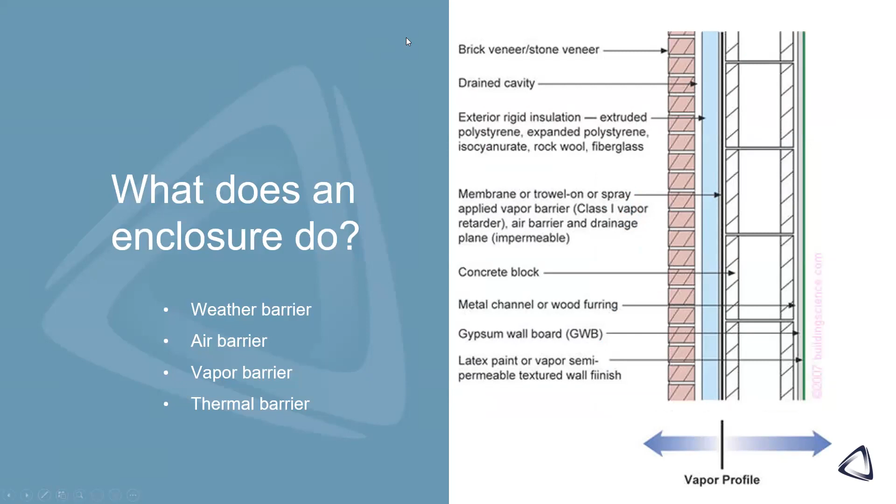Are you able to see the next slide here with the weather barriers? So there are different types of weather barriers, and their primary function is to resist any kind of weather elements affecting the building, and to get them out and away from the building so they don't have an opportunity to intrude inside.

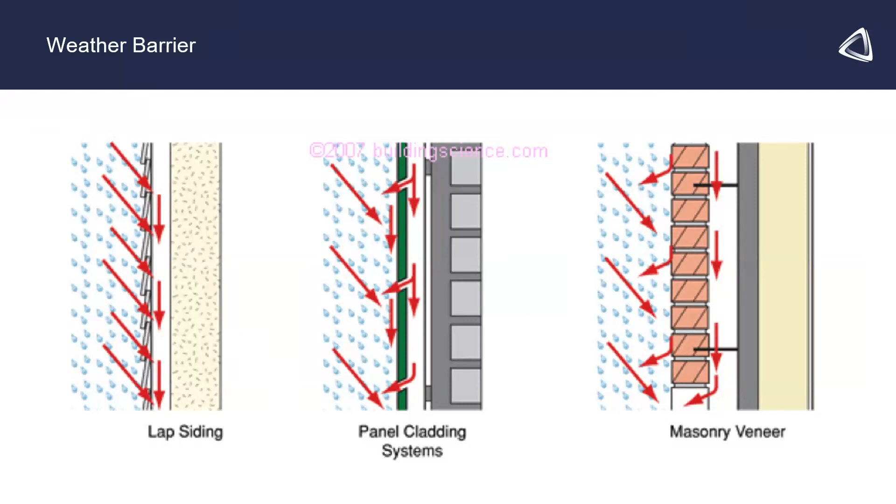You may have siding that has drainage on the inside, metal panels or cladding, or a brick system. All of those are meant to resist a majority of moisture or snow, and then also have some sort of drainage system. With a brick wall, there are weeps, or usually netting, to capture any materials that get back there and direct everything out and away.

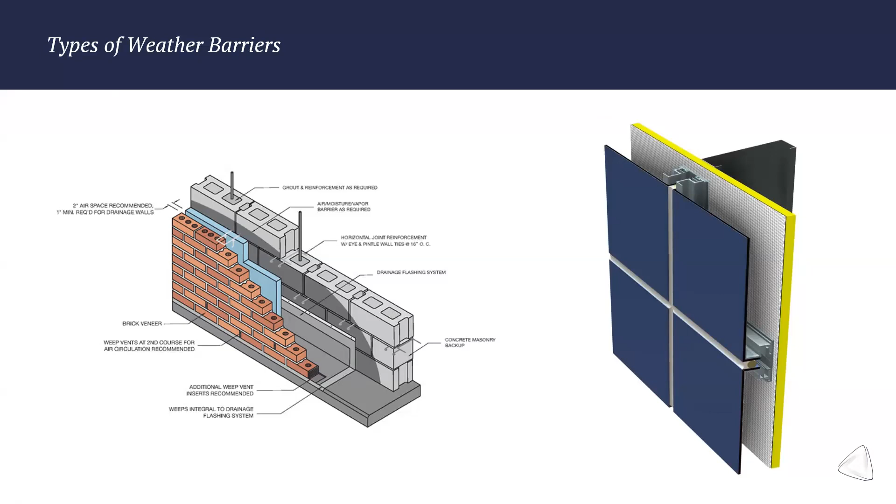Metal panel systems likewise have their rain screen, and a gap behind them intended to direct water out and away from the building. That's its primary function—to make sure the rest of your wall system can manage the other components and not have to deal with the intrusion of water or the effects of driving winds.

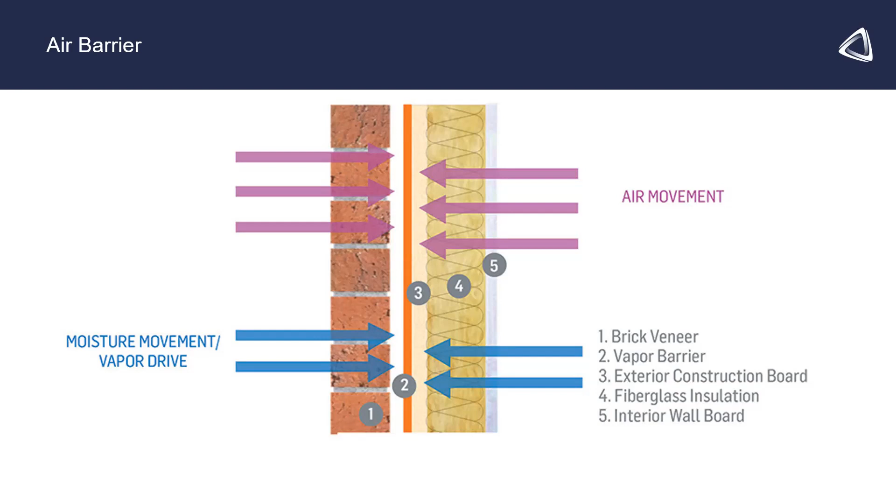The next layer would be your air barrier. An air barrier is exactly what it sounds like: it prevents air from moving from inside the building out in an uncontrolled way, or from the outside in. You may notice this as drafts or an inability to control the temperature in a space. Those are all signs that you aren't able to prevent air movement within your building.

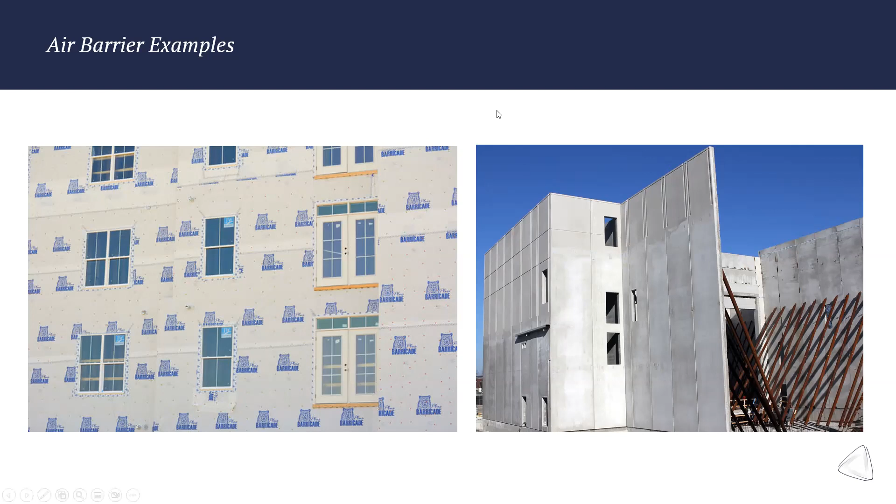The whole point is to prevent infiltration and exfiltration—you just want to be in control of when air is entering or exiting the building. Anything uncontrolled is going to directly impact comfort and your occupants.

There are a couple of different things: there's driving wind that can drive air into or out of your building, and there's a stack effect, which is essentially warm air rising. When you have a lot of warm air rising with a pathway out, that draws air in at the lower levels—again, uncontrolled air that can cause discomfort. And then there's also combustion and ventilation.

Your HVAC systems typically are controlling the ventilation, but you may have combustion, especially if you have older boilers or water heaters that might draw air from the building for combustion. You want to make sure there's a free-flowing path to make up that air, so you're in control of it and not just dealing with air coming in any opening or crack it can find.

So if you find yourself with drafts, air intrusion, or issues controlling temperature or humidity, you may want to look at your air barrier.

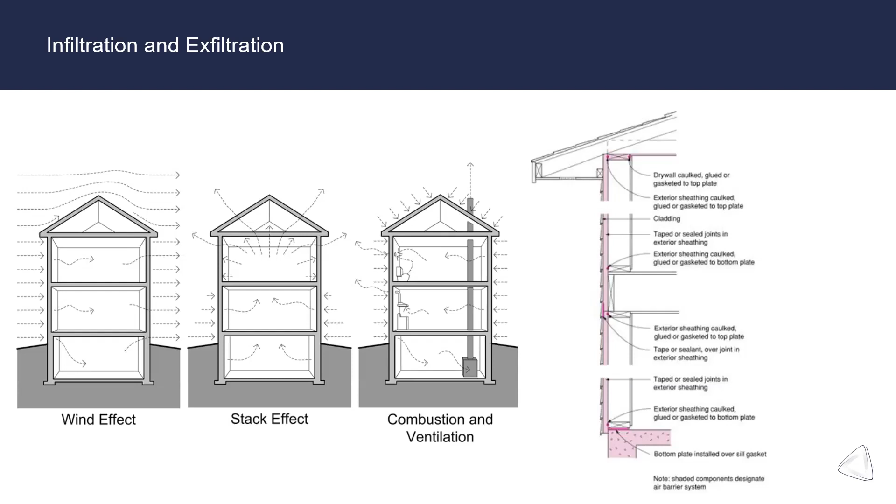And then at the top of your wall, into the attic space, you don't want your air moving up into the attic, because that would encourage the stack effect. So anything at the top of the wall, make sure it's sealed up—those are all things you could look at if you suspect you might be facing some of these issues.

So there's going to be a desire for air and moisture to migrate inwards towards your interior space. There are different ways to combat this. You can positively pressurize your building, which is always a good thing to do, just to have it slightly positive, so that if a door is opened, or if there are imperfections in your envelope—which there always are—the air wants to move outwards, giving you more control over comfort.

In cold climates, or winter conditions, when it's cold outside and you have your heat on and it's warmer inside, you have the opposite, where temperature, air, and moisture want to migrate out of your building to the exterior. There are different scenarios where you may want to look at different building pressure settings, whether positive, negative, or neutral. That would depend on where your vapor barriers are and how your assemblies are put together.

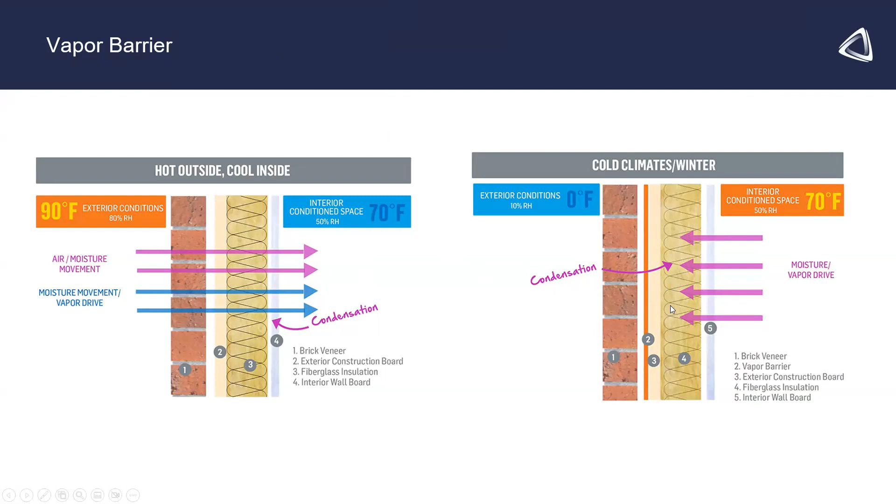If you have newer construction, a lot of the newer materials can't withstand that vapor movement as much, or aren't designed to, so we see vapor barriers more commonly today. The big takeaway is that if you have a wall system without a vapor barrier that's intended to have vapor move through it, you're probably best sticking with that method rather than trying to redesign or re-engineer it, but more so try to get it back to its intended function if there are any deficiencies. This is just a general overview of a vapor barrier.

You want to have a continuous barrier throughout the building, meaning a barrier under your concrete slab, a barrier within your wall system, and your roofing system, and they all need to tie together. If you find humidity issues in your building, or issues with moisture or freezing within the walls at some point, these connection points between different barriers are culprits where failures can happen more easily. But in general, your vapor barrier is where you'd want to investigate that.

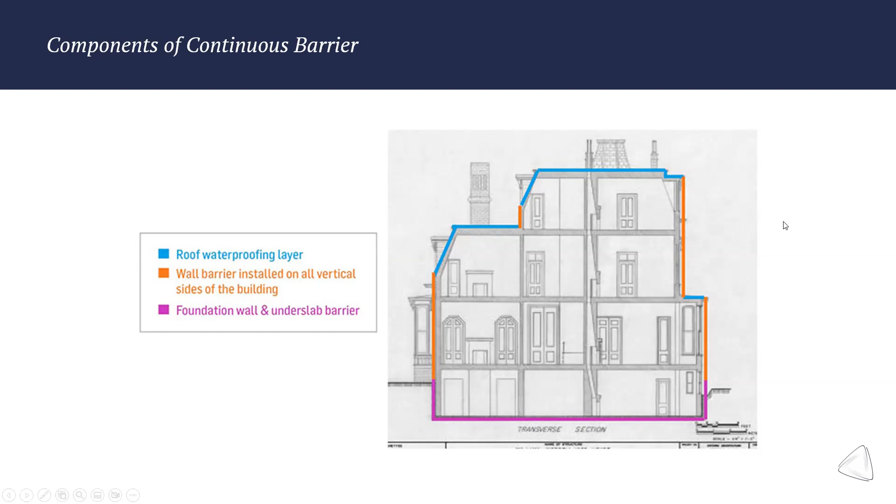Continuous barriers, so the foundation, you have a sheeting that goes under the foundation. Obviously not much you can do about that after construction. If you have it, great. If your building was built before that was common, then you may not have it, in which case you most likely have a building that's designed to allow vapor movement.

Wall systems, it could be a sheet or spray applied. And then on roofing, there's a lot of different roofing types, but like a TPO is a common one we see today.

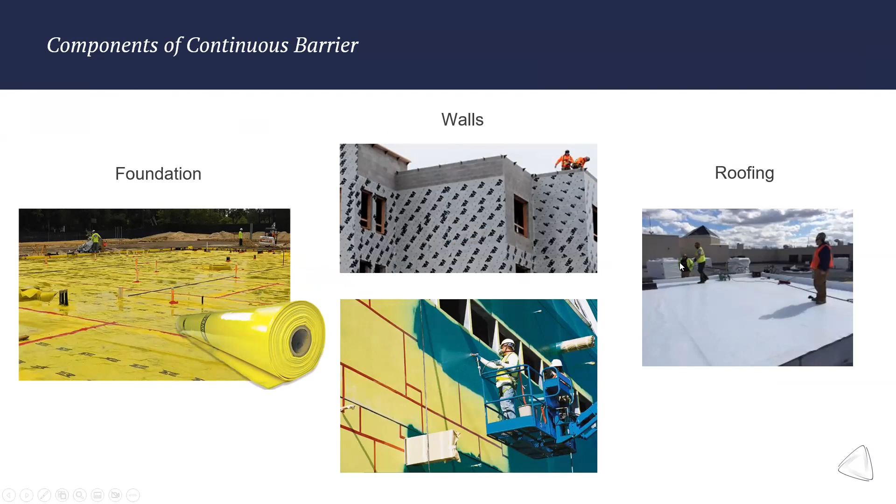For vapor leakage, just to get it into perspective, if you had a 4x8 sheet of gypsum that had vapor differential from one side to the other, so it wanted to travel through your gypsum board, that board itself may allow 1/3 of a quart of water through over an hour under this fixed condition. But if you had a hole in the wall, just a 1-square-inch hole, maybe like a poorly sealed electrical outlet or something in a drywall opening, that could allow up to 30 quarts of water in just by allowing the migration of air and moisture.

And so in the summer, if you're seeing anything where you have high humidity in the spaces, it's muggy, it feels sticky, and you can't figure out what's going on, your HVAC seems to be working properly, this would be a good place to look. See if you can feel any air movement where you have any penetrations or openings in your walls, and look inside, interior and exterior, to see if you can find any potential leakages.

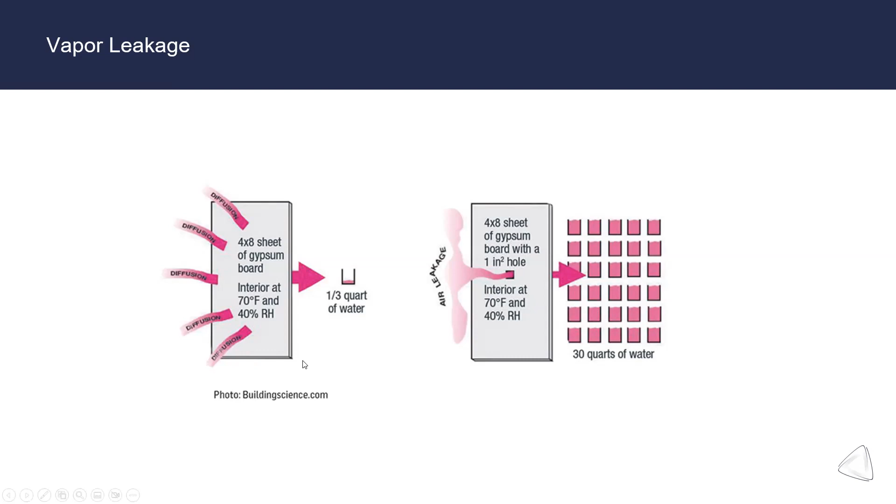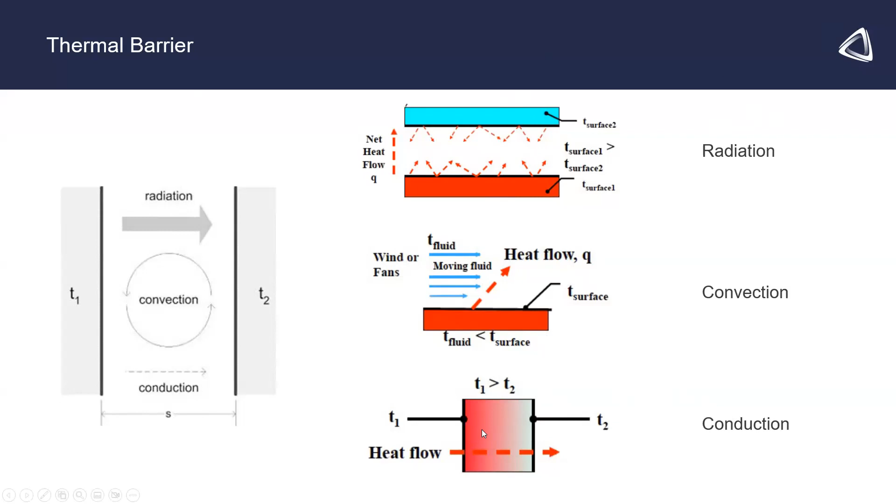The next is the thermal barrier. Thermal energy can transfer through radiation, convection, and conduction, and these highlight those 3 different methods. Radiation would be between surfaces that aren't touching. Convection would be through the movement of some medium like air. And then conduction would be through materials that are touching or just have a temperature gradient across them.

To combat that, you can use insulation, and there's a lot of different types of insulation. There are applications where some types are more important or more applicable than others. So there's batt insulation and blow-in insulation that you can commonly see in walls and in roofs. And blow-in insulation may be a good option if you're looking to ever retrofit or add insulation. That's usually one that's easier to get into an existing structure.

And then there's rigid insulation, mineral wool. You have 2 different types of polyiso, with and without the foil face on it, which would basically say if it does or does not allow vapor to travel through it. And then just like your typical styrofoam. And then there's also spray foam, which comes in open cell and closed cell styles. Really, if you want to add insulation, these are kind of the options that are out there, but it's definitely worth having someone look at your construction type and recommend an appropriate insulation type for you.

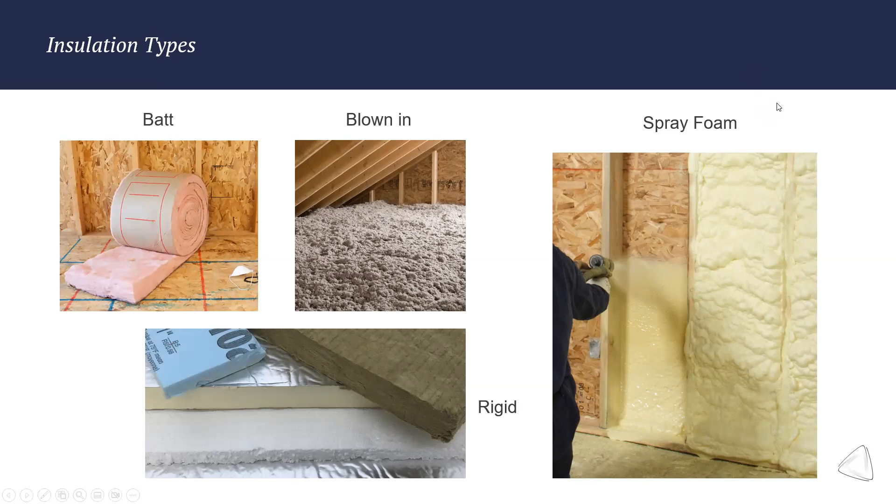And then thermal leakage is kind of the result of poor insulation. There's a lot of different areas where it can happen. Windows and doors and any kind of openings or penetrations are a great place to start looking.

On windows, you can look at sash leaks. You see little streamers like this. Streamers indicate air movement. So if you have air leaking in, something like that, it would show up in that way. And so you might want to look for seals or something like that.

The frame here is very dark, so that would indicate it may not have a thermal break, maybe it's conducting, or maybe there's a failure of a seal. This outlet appears to be leaking, so that would maybe be air moving through the wall system there. And at the floor plate here, you can see the cold gradient. Potentially there's not a good seal at the floor plate or something there that needs to be looked at.

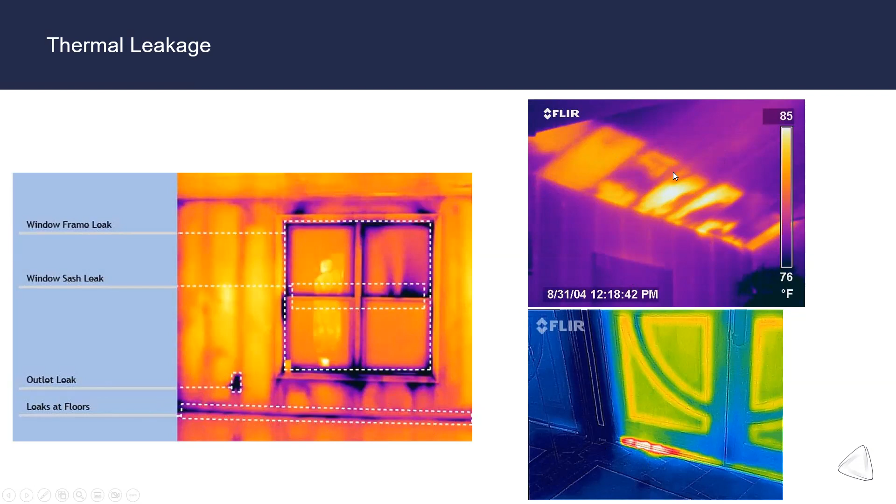Door seals as well are a common culprit. Just making sure that they seal properly can make a big difference, especially in the hot summers and cold winters. And this is an image, top right, of a ceiling that has poor insulation at the edges of the roof. Things like that where you might want to consider additional blow-in insulation or batt insulation.

Next I want to go through some signs of compromised building envelopes, things that if you're walking through your building and you see, you may want to take note of and consider taking action on.

Any peeling or flaking paint can be a sign of swelling due to moisture, which in this top right picture is hopefully obvious to you. If you have water just dripping out, that's a problem, but a lot of times it's not that obvious. It's just moisture or condensation that continuously shows up in one area and can lead to mold or swelling of drywall or plaster.

Likewise, you can see this black in the windowsill, and you can see the paint degrading. Those are all signs of moisture, things you could look at that could cue you in that maybe something there could be improved or something is broken down.

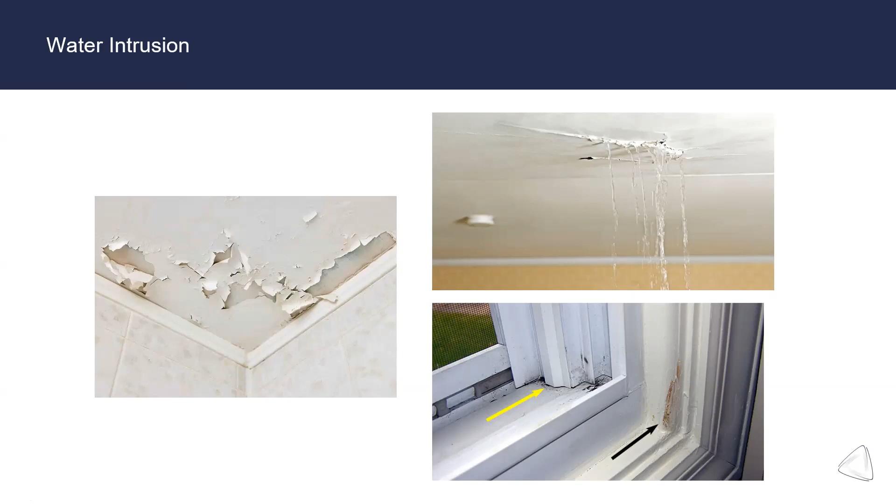Mold is an obvious one that everyone is kind of keen on. Anywhere you see mold, that means there's moisture, and your building's not intended to have moisture sitting in any of your interior or wall spaces. So anytime you see mold, know that there's most likely a cause that needs to be addressed, and also the repair of the damage.

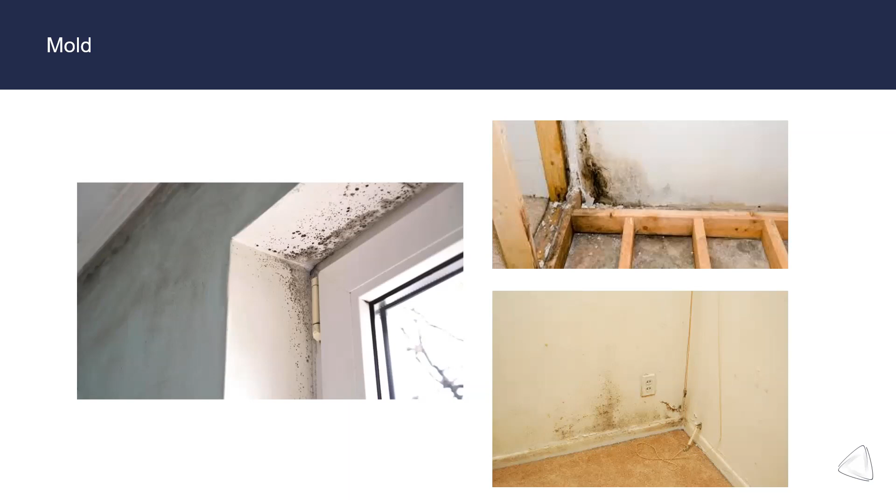There's penetrations from air conditioners that would be good places to check for leakage. Where your floor to floor connections are, there could potentially be leakage if there's not a good seal at the floor plate or at the ceiling level. Where your wall cavities meet your attic, you want to have airflow in your attic, but you want it to go from your eave up into the attic space and be neutral temperature to the outside. You really don't want air from the interior of the building going up into your attic space. That can cause melting of snow and icicles and things like that, which can cause damage or just be dangerous.

Any penetrations to the attic space are good to look at: exhaust fan openings, duct connections, lights, whatever there may be. If you have a lot of infiltration, all of those things could be adding up to what is equivalent to a large opening, but not apparent as a very large opening. And then there's window seals, door seals, and those types of things that are all great to look at.

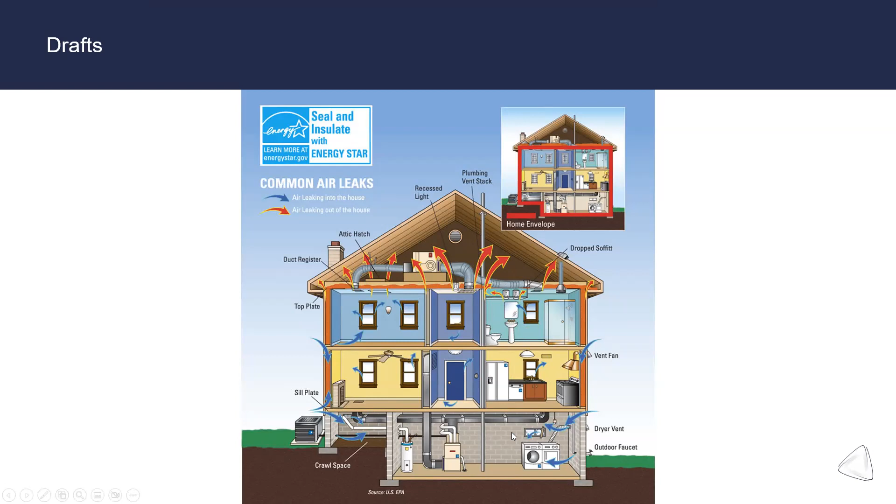Condensation is another one to look for. If you have single pane windows, you may see condensation, and that's more a result of older window technology that really doesn't have the ability to prevent it. But if you have double pane windows or windows that are thermally broken, you wouldn't typically see that with common interior conditions.

Now, if you do have single pane windows or non-thermally broken frames, meaning if you touch the frame it would be conducting from the outside, so it'd be very cold, you can prevent condensation by maintaining a lower indoor humidity. That's a good way to address the issue related to the construction of the building, but it may have a negative impact on comfort. But if you do have more modern windows or thermally broken frames and you're seeing condensation, that could be a sign of a break in the seal for the gas between the glass, a break in the seal for the window frame, or a construction error causing a thermal break of some sort.

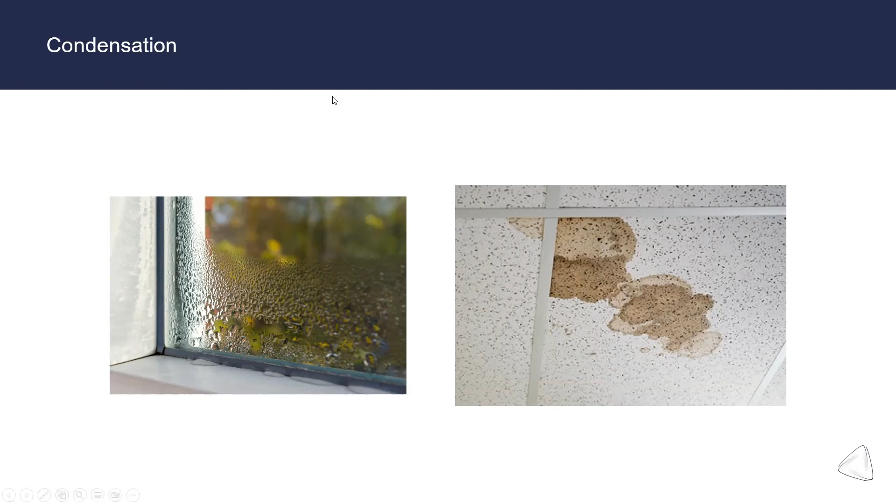And those are potential areas for mold to form or for damage to happen due to the moisture. Also ceiling tiles, if you see them discolored, that's due to moisture. And just know that replacing the ceiling tile isn't the fix. There's usually some cause, and it's definitely worth looking into what that cause is for the moisture, and of course then replacing the ceiling tiles once it's taken care of.

So that was really quick, just trying to give a high level overview. I'm definitely happy to answer any questions, and a lot of what you come across is going to be specific to your building. So Catalyst Partners is a resource for you to utilize throughout your treasure hunt.

Please feel free to reach out if you have questions. We do have a thermal camera, and when we do our visit to the sites that we are sponsoring, we intend to bring it with just because it's a great tool. But if anybody else wants to try to track one down, just know we have one, and we'd be happy to try to share it if there's any benefit to you.

All right, great. Well, I wasn't keeping track of time, so I hope it was good. That's okay. Does anybody have any questions at this time?

Just want to thank you, Mr. Warren Tursky. It's an excellent presentation, very comprehensive overview, and really stimulates our thinking, gives us this whole other organized way of thinking about our building. Appreciate it very much. My pleasure.

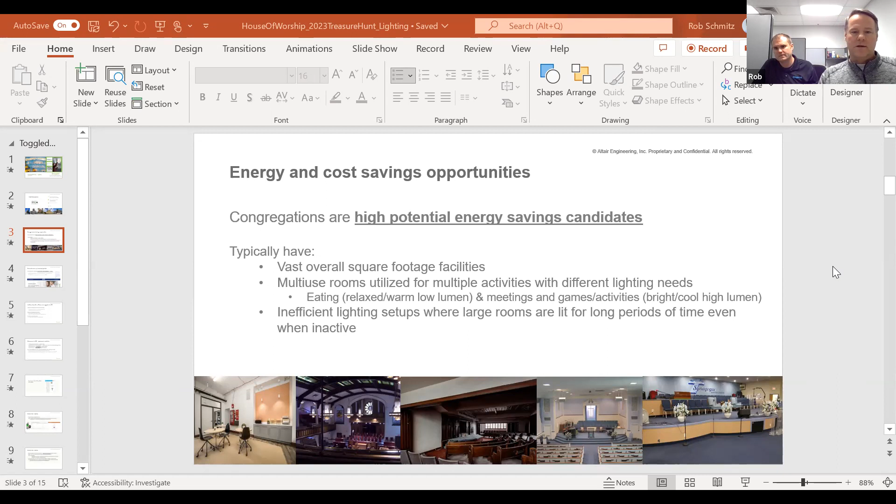A lot of people in my experience, when you start to go down lumens and kelvins and color temps, it gets a little confusing. So a lot of people will think of LED as being very cold and uninviting, and I think that's just very inaccurate, to be honest with you. They've come a long way with LED, with efficiency, and it's just a nice way to complement your lighting and save a lot of good money. So definitely consider LED moving forward.

Investment periods, I just want to touch really quick on this. We've seen more recently even better than 1 to 2 years from your initial investment for your return, obviously with the reduced energy bills. So some of the smaller projects we've seen, and Ryan's much more versed on this than myself, 6 to 8 months and you're good to go. You've got that future of decades of lighting. So definitely a good decision if you haven't already looked at upgrading fluorescent to consider it.

And I kind of touched on some of this, but your aesthetics greatly improved with LEDs, security because of the better quality light. As a visitor, I'm in lighting, so I'm always looking at buildings when I walk in. I'm looking at the lighting, but I quickly notice when lights are out and whatnot, it just gives a bad appearance for the building. So it is important to make sure all your lights are on and working efficiently.

Extending maintenance periods is another big feature for LED. A lot of buildings, maybe you need a lift to get up to high ceilings. Fluorescent lights tend to go out yearly, to be honest with you. You've probably experienced that if you have fluorescents. With LED, again, you get decades. So definitely worth that investment.

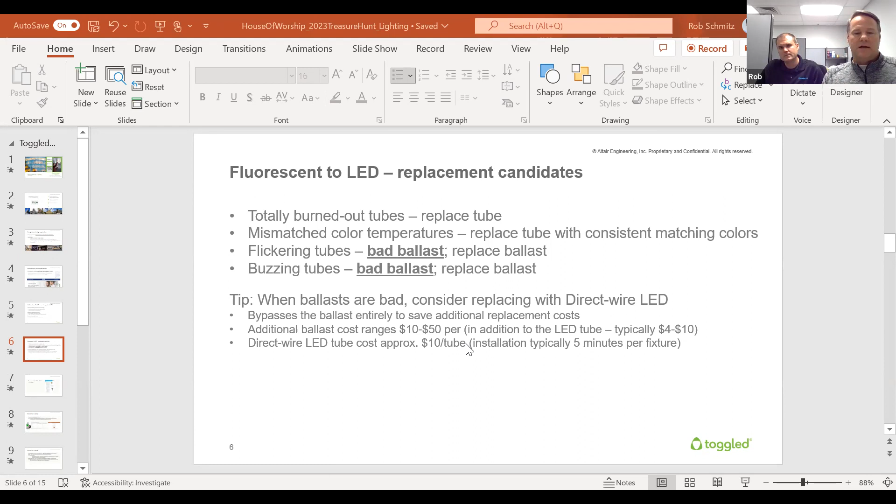Not to mention, you have to get the correct ballast replacement, and Ryan's done numerous jobs like this - sometimes it ends up being an issue. So getting rid of that is a definite if you've got buzzing or flickering.

I want to spend a couple minutes on this checklist from last year for lighting specifically - hopefully this is still accurate. We're happy to walk through buildings with anybody of interest. The first step is ensuring proper lighting levels. There's a light meter out there - we have one, but you don't need to buy this by any means. If you do want to do it on your own, we've seen them on Amazon for 30 to 50 bucks, but it's not necessary. It's something we can come do - we'll make sure the lighting levels are accurate for you.

You don't always want to replace specific lights with the same lighting lumen levels. We're always looking to improve with these upgrades, and this is a tool that helps us do that.

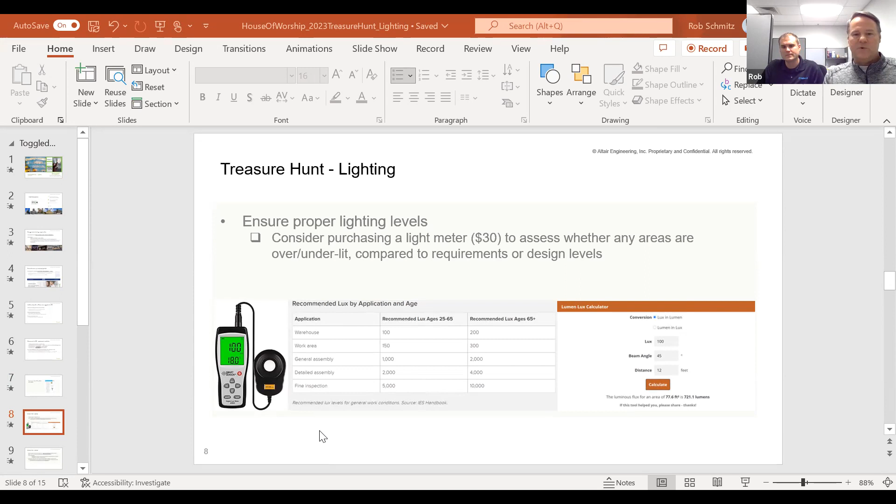Typically what we'll do, if we do come along or you do this on your own, is walk the grounds and do everything we just talked about - look for the lights, see where you're missing lights, etc. We're pointing out worship areas, offices, restrooms - there's a lot of rooms typically within your facilities to look for. Usually back rooms are culprits - a lot of people aren't looking at back rooms, so we see a lot of light outages and issues there. Keep those in mind.

There's a point here about checking the parking lot outside for day burners. This really applies more when you have lighting controls or sensors - a lot of times those sensors get covered with dirt and blocked, and they end up on all day long. So if you have an issue with lights being on and you've got controls, make sure those sensors are clean. If you don't have sensors and you're seeing lights on, that's probably just people leaving the switch on, which is unnecessary energy loss. We'd encourage considering sensors in that situation - they're really not that expensive and could save you considerable amounts of money.

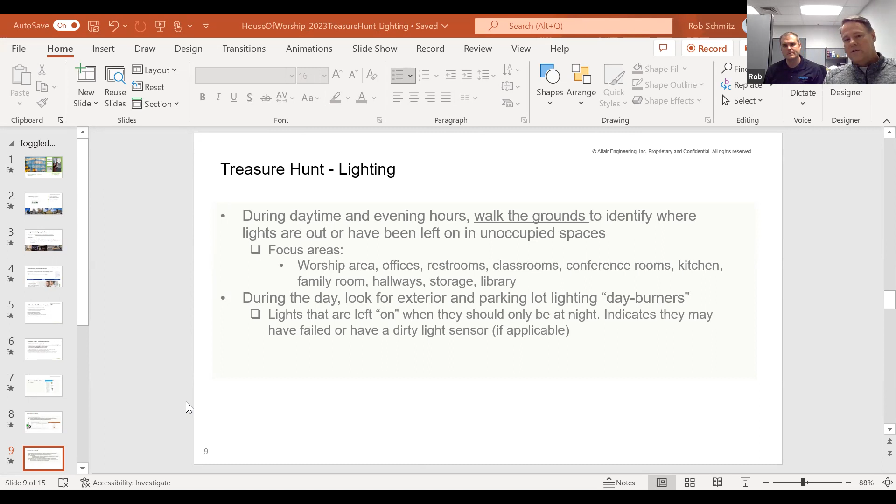And not a lot of headaches. I think these sensors have come a long way over the years. So, moving on.

Upgrading your exterior lighting is more for your neighbors, if you will. Consider shielded fixtures that direct light where you need it. We've seen this being a big issue in the Metro Detroit area, lights going every which way. It's a nuisance to your neighbor and it's not giving you what you need, so getting a shield for that is a good way to correct it.

I mentioned checking for cleanliness. Again, it's shocking how quickly things get dirty - dust, bugs, debris. We recommend setting some sort of schedule for cleaning to make sure that's not forgotten, to improve your quality of light.

There's a point here about considering delamping. This is something that would be paired with the light meter. A lot of rooms, believe it or not, are lit too much. The people that set the rooms up may not have really been looking at those levels, just throwing lights up haphazardly. So there's a chance to take some lights out and still get levels that are good with less energy usage.

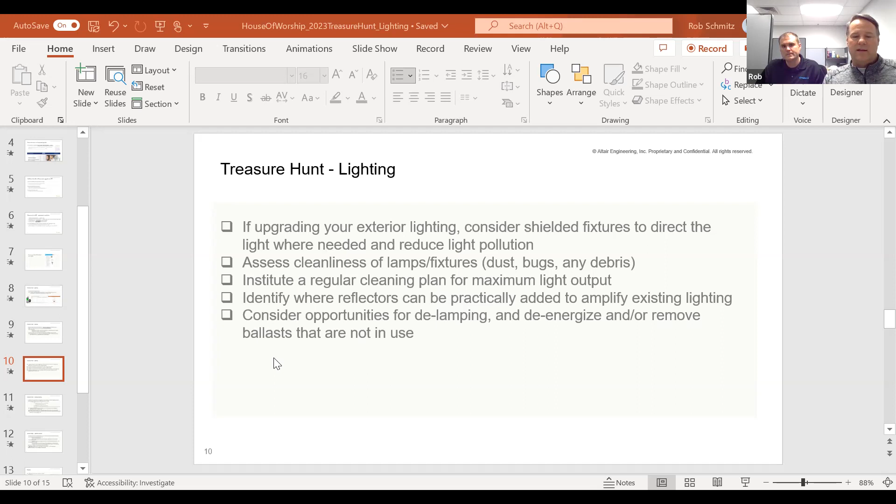T12 fluorescents, if you're not familiar, are like 1.5 inches - the big tubes. I know sometimes we take for granted what you're looking for, but if you see a large glass tube, more than likely that's a fluorescent. We'd definitely move to LEDs, which are T5s and T8s, to get that savings.

We've seen anywhere up to 70% savings. Some of the older fluorescents are really inefficient. Even the newer fluorescents, your lumens - light output per watt - is roughly 50, and that's on a good day. With your LEDs, you're looking at 131. That's showing you where the energy savings is, and that's a low number I'm using for the LED example too. So definitely something to consider if you're looking for energy savings.

Longer life too - there's a ton of ranges for fluorescents. Honestly, I've seen things blow out in 6 months, but with LED typically you'll get guarantees of 50,000 hours, which if you do the math is decades of usage. With us and a lot of other companies in the LED market, it's pretty easy to get a warranty replacement should there ever be a failure, because they're so rare.

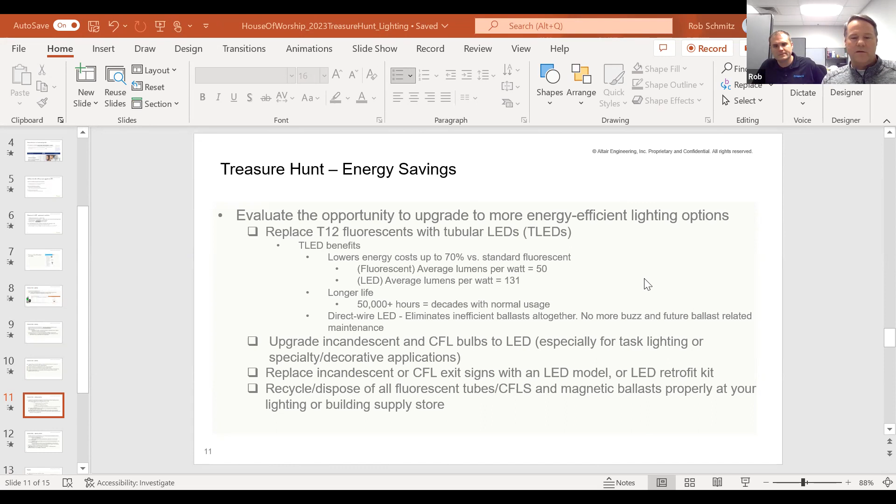Lighting controls, I touched on earlier - we do offer lighting controls, we don't manufacture lighting controls and building controls. It's something we can help you guys with. If there's interest, we can direct you to whatever you might need, any kind of third party out there. So if there are questions on lighting controls, let us know.

We do see this with motion sensing - a lot of rooms aren't in use despite congregations. You've got one switch lighting 50 fixtures, and it may be on all day. I'd say it's worth putting a sensor in so that when there's no activity it'll turn off. Some hesitancy we've seen with customers is they don't want the lights going off after 3 or 5 minutes. But you can set the systems to turn off at whatever duration you want - if you're not comfortable with an immediate turn off, you can program it for hours. 30 minutes would be realistic, especially when people go home at night and often forget things on.

I definitely recommend the sensors there. Schedule timers - this is a nice feature too with lighting controls, because obviously you can set things up. You can probably do 10 different schedules for a day if you really wanted to. The cleaning crew comes in at 6 o'clock and they're there till 8, so when the light's on, you can program it however you see fit, when you start the day, etc.

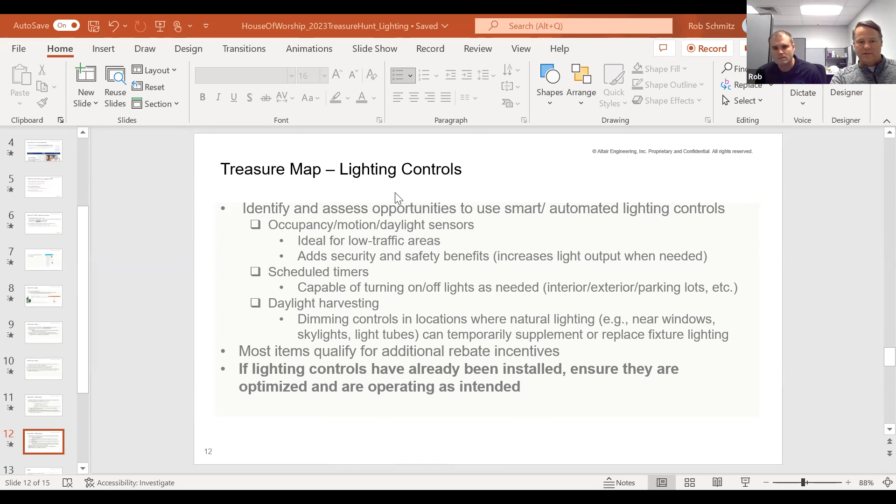Mentioned that already, the rebates. I did list a couple resources out there if you want to do some research on your own, but Energy Star is a good one. I've put in there energystar.gov. There are additional sites - again, this is more Ryan's area.

Are there any other sites that you'd recommend? DTE is a nice one to check out, and they'll offer more detailed information than I'm relaying here. Yeah, DTE is a good one - if it's on the DTE site, there's a good chance they're a reputable company.

That was one of my big points from a few slides ago - LEDs aren't created equal. There's a wide variety of very high quality product all the way down to the cheapest of cheap, and sometimes it ends up catching you quicker than you think. If you go through all this work to replace and upgrade to LED, you don't want to be back to replacing your lights 6 months from now. So there's cheaper options and the highest quality out there, but they'll be reputable if they're on that DTE site.

I'll piggyback off Rob here - a lot of places of worship in the last 6 months have had LEDs in their buildings for say 2-3 years now, and they're like, all right Ryan, what's the next thing? That's where lighting controls are becoming that next 30%, 20%, 40% in some cases. Places of worship have little spurts of population - Sunday service they might have a full house wall to wall, an hour after service they might only have one room occupied, but yet the lights are on all day. So that's been their next 30-40% - we all got LEDs, we did all these upgrades, now what's next? And the lighting controls is where the next step seems to be headed.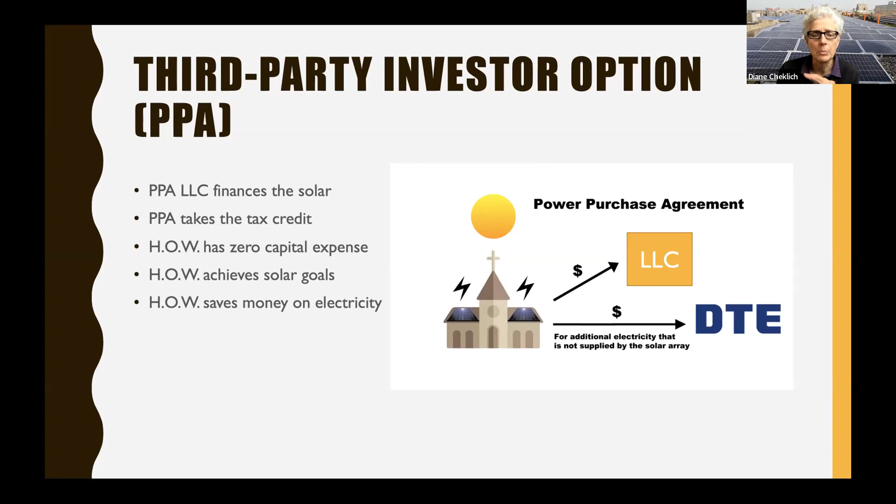This little graphic shows that for the energy generated by the solar, it's like you're getting two electric bills now that together add up to less than what you were paying before. You'd pay one to this LLC for the energy generated by the solar, and for any electricity still necessary after that, which the solar probably won't cover entirely, the rest would be supplied by DTE. That's typically how that arrangement works.

Now, there's also kind of a before and after option here as well. If you're interested in using this third-party option, where do those investors come from? Well, a lot of times it's, who do I know, or is there someone within the congregation? Like Bob Chapman, like me, has done a third-party investor approach to get the solar on St. Peter's. But those people need to be recruited.

They need to be identified, who are they? They need to form an LLC. You need to select an installer, keep an eye on the system, make sure it's up and working, and also create invoices every month for that energy.

So there's a bit of a lift there, and I speak from my experience as well. It definitely can be done, and there's sort of a cookbook formula you can follow, but it's a lift, and it's sometimes hard to find those investors on a case-by-case basis.

There is a new option being formed as we speak, a turnkey PPA that could be available, where the investor is already in place, the LLC is already in place, the installer is in place, although there could be other installers. You would sign up and get all the advantages of participating in a PPA, but you don't have to create it from scratch and go out and recruit people.

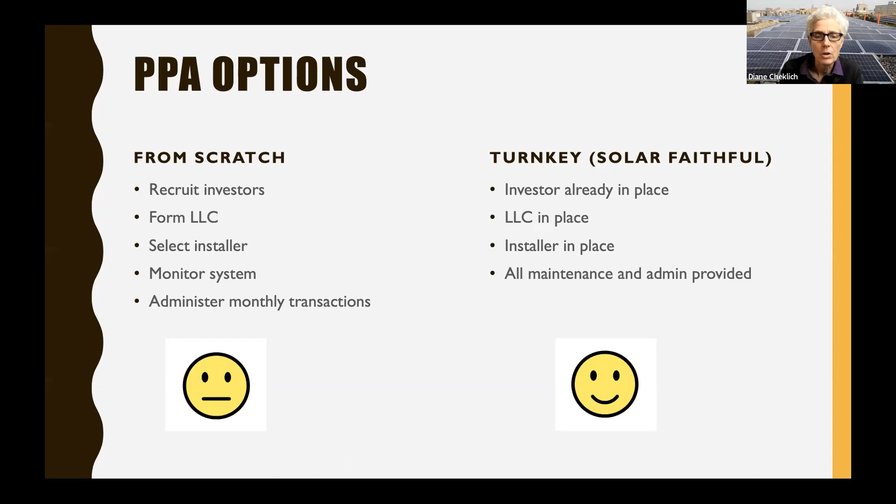That group is called Solar Faithful, and it is a PPA service focused on houses of worship. It's a nonprofit organization itself, designed to make this PPA model more accessible, to lower the barriers of participating in this type of model without having to reinvent the wheel and create it yourself every single time. So there is a single financing partner who's already there and has agreed to finance multiple projects.

The participants are still guaranteed a lower energy rate than through the utility, typically a 10% discount. The Solar Faithful officers are representatives from Michigan Interfaith Power and Light.

In fact, their very own Jennifer Young is one of the officers. Rob Rafson from Chart House Energy, and Steve Mulder from the Climate Witness Project, which is part of the Christian Reformed Church. I and Diane Van Buren are actually on the board of directors for Solar Faithful, and Murray from Genesis in Ann Arbor.

So there's a board of directors of, I'm not even sure the number of people on it yet, but we all have the interest in promoting access to solar to houses of worship who are interested in using the power purchase agreement model. It's just another option out there.